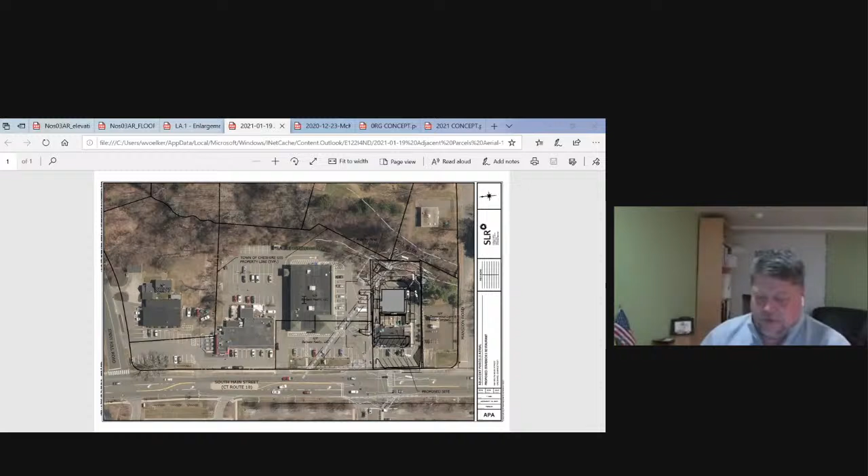And the next one, the special permit application of Nozzle Properties of South Main Street LLC, care of Anthony J. Fazzone Esquire, Fazzone, Ryan, and Mercuti LLC, 2 Town Center, Cheshire, Connecticut 06410, for a coffee shop with a drive-through to serve customers in motor vehicles, and a modification of the side yard setback as permitted under Section 32, Schedule B, Item 6A of the Cheshire zoning regulations. Property located at 944 South Main Street, Cheshire, Connecticut 06410, as generally shown on Assessor's Map number 78, lot number 159 in the C3 zone.

Thank you. And representing the applicant tonight? Yes, Anthony Fazzone, Fazzone, Ryan, and Mercuti, with offices in Cheshire. I'm an attorney. With me tonight is Darren Overton of SLR and Dave Sullivan of SLR.

Just briefly, this is a special permit application and not a site plan, and that's because there is a proposed drive-through, and also we're looking to hopefully take advantage of a section of Schedule 32B in its footnote 6 that allows what you may consider a jointly owned property, allows you to vary and even if you saw fit to eliminate the setback requirements between the two properties.

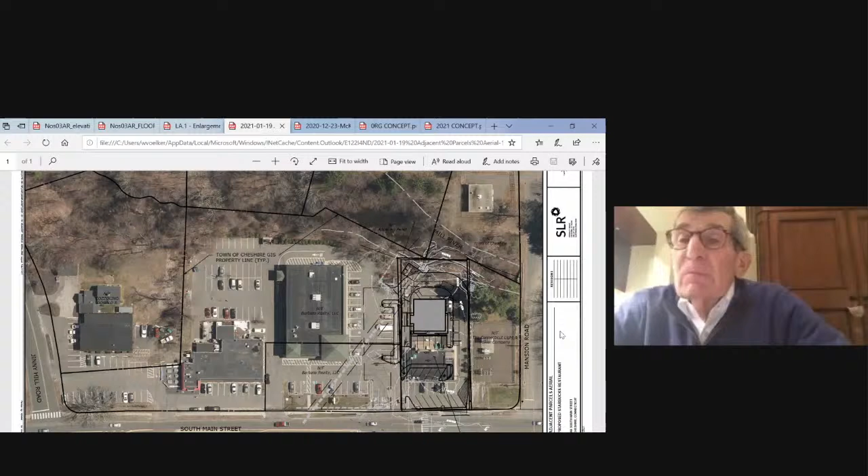We'll get into the details of that, but I'd like to have Darren go over the site plan.

Good evening, everyone. Darin Overton from SLR Consulting, and as Anthony mentioned, Dave Sullivan, our lead traffic engineer, is also in the meeting tonight, so he'll be available to answer any questions related to the traffic study that we prepared as part of the project.

This overall plan shows the relationship of not only the former building at 944 South Main Street, which was the China Dragon Buffet. That building has been removed, and in lieu of that, coming in with this new proposed development.

North is oriented to the left on this plan, and it shows a relationship to the north with the existing Rite Aid building and other commercial developments that go all the way out to Ginny Hill Road. As you can see on that plan, the properties are all developed contiguously. They're interconnected with access drives and parking lots, looping through from the Route 10 entrance that will serve as the access to this property, all the way through to the connection out to Ginny Hill Road.

Abutting this site to the east is the Mill River. To the south is an existing Eversource substation. And then to the west is Route 10, which serves as the frontage for the property. There's existing parking infrastructure that still remains from the former restaurant.

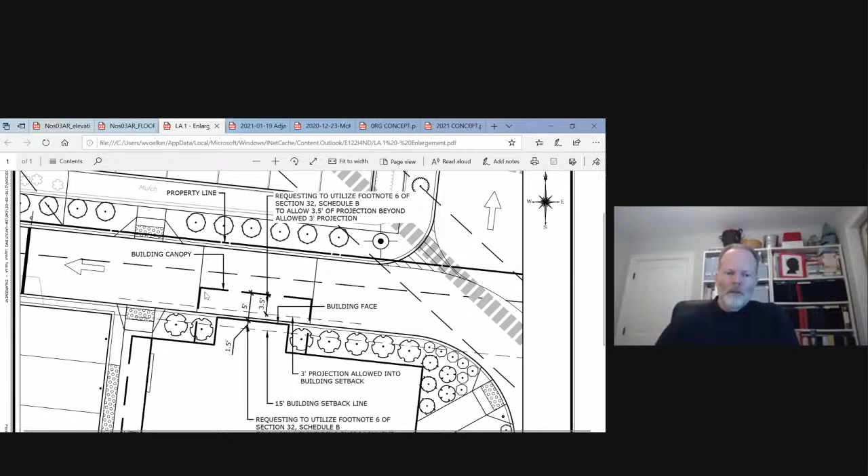We have a small encroachment for the area that juts out of the building to the north for the drive-through window access, about 1.5 feet. Then there's a 5-foot canopy that extends out and covers the drive-through window. There's actually a 3-foot projection allowed in the regulations, so it's about a 3.5-foot encroachment that we're accommodating under the section of the regs that Anthony mentioned earlier, as part of the combined development, section 32, Schedule B.

And that references multiple properties that are maintained as a single project.

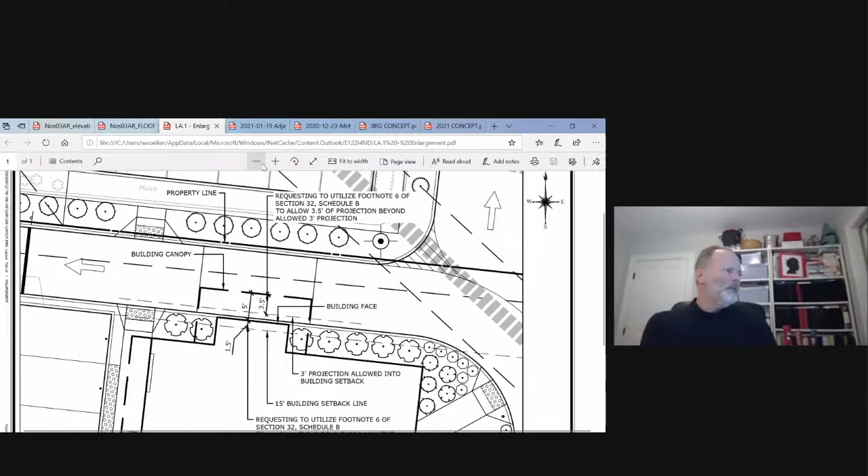The stormwater management plan is pretty straightforward, similar to what exists there. We've maintained the watershed out front to the state drainage system, similar to existing. We have a pipe and catch basin system that discharges to the back of the property where the existing state drainage discharge is located. We have water quality in the form of sumps and a hydrodynamic separator.

Some of you might remember there was a Chase Bank application for this property that was brought before the commission back in 2018. Our drainage system is a very similar setup to what was proposed as part of that approved project.

As part of the notification of the Regional Water Authority, we did receive some comments from them on December 10th, and I talked to Ron Walters at the Regional Water Authority. As part of that discussion, we developed a rain garden in back that serves two purposes: it provides additional water quality treatment for runoff from the pavement on the backside of the property before it discharges into the Mill River, and it also provides floodplain compensation as part of the development proposed within the floodplain.

We do have an E&S plan designed to meet the town and state standards. I'll close by saying we have also received comments from the fire department and the engineering department. I spoke with Mike Kozlowski from the fire department, and they want a fire key box, which the applicant is certainly willing to provide. They also wanted a modification to the existing island that exists at the entrance on the Rite Aid parcel.

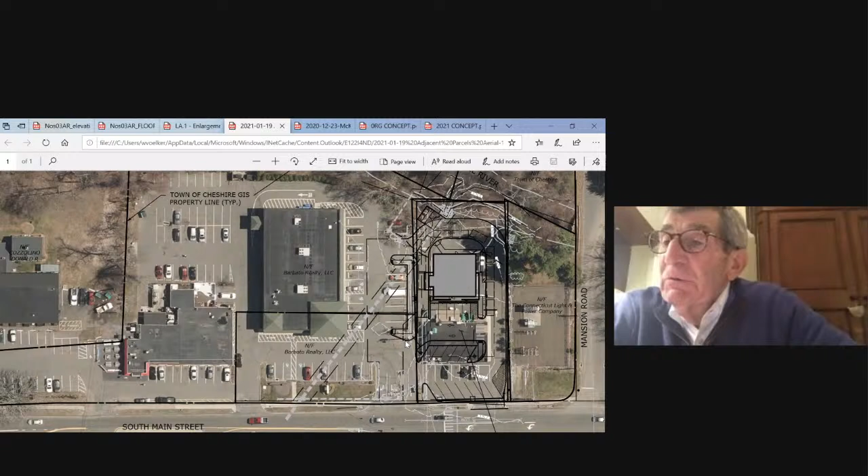Okay, sure. Dave Sullivan from SLR. We did do a traffic impact study.

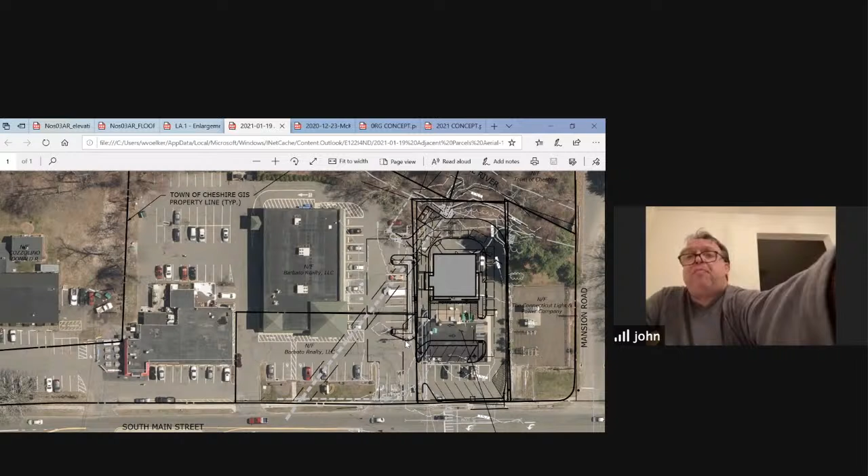Probably the biggest challenge of doing traffic studies these days is the base data. So we did collect data at the signalized intersection where the access would be provided in COVID conditions. We also found some non-COVID data from DOT and placed a traffic counter at the same location to determine what the differences were in COVID versus non-COVID conditions.

Based on that, we increased the morning counts we did by some 23%, and the afternoon counts we increased by, I believe, 35% or 37%. So those were the adjustments that gave us the base traffic volumes.

We then estimated the traffic that's going to be generated. We used ITE. In general, there's round numbers, a couple hundred trips in the morning that'll be visiting the site, and about half of that in the afternoon.

And we assign that traffic to the traffic signal with the increased traffic volumes. And we found that the levels of service will not be impacted, and generally good levels of service will be maintained during the peak hours.

We looked at the queues. There'll be very little impact on queues, and the maximum queue exiting the driveway was found to be 3 vehicles, which we checked to make sure the circulation at the signal, at the driveway to the signal, would work. So that's a thumbnail. I'll be happy to drill down on any particular issue or any questions you may have.

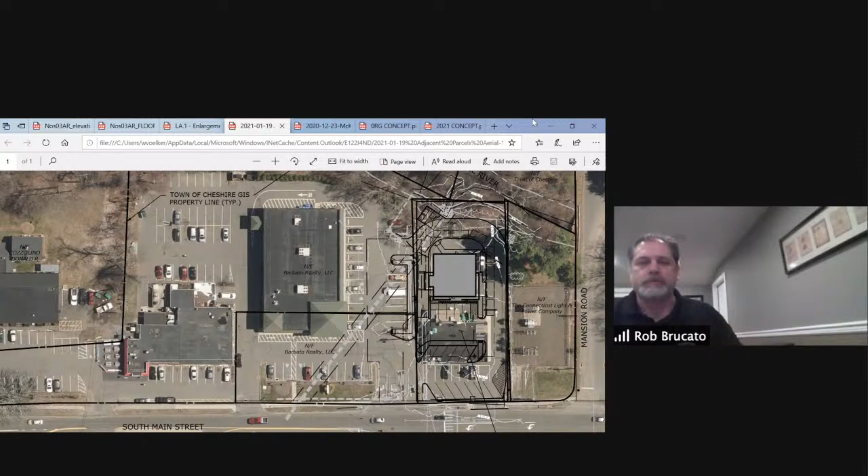The design of the building itself, what you guys proposed, I personally don't feel that it fits in this area of Cheshire, maybe something over in the ISS zone. I'd like to see something that's designed more with mansard or hip type roof that fits in. Even the Rite Aid that's right next door has that type of feel, and then you have little roofing on the little plaza. And if you even go over to Pizza Hut, that has some nice roofing, not this new contemporary look.

That I'd like to see change. I don't know what other commissioners feel. I just don't feel that that's the fit we're looking for and trying to bring into Cheshire, especially in this area. I know I've worked on the gas station down the road to get that to fit, have a better feel. So I just wanted to make that clear that at this point, I don't like the design of this building. I think it needs to come into what we want to feel in that nice village type look into Cheshire.

The other quick question is, with the power station or whatever that is right next door, moving that extra 5 feet for that awning, is there any kind of trucks that need to get around there? Is there any easements that they have that might interfere if they're trying to work on those lines? Because I know they have a lot of room on one side, but I don't know if they have to get on both sides of that little building that's in there. Do we know if that's been cleared through them?

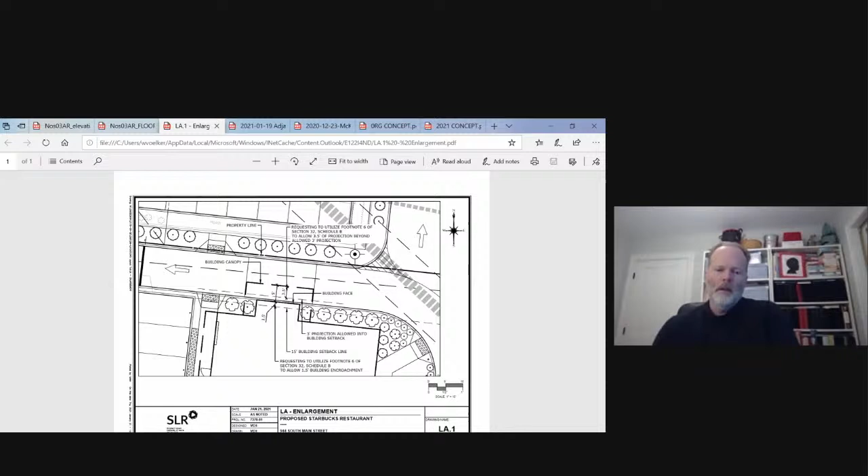We did look at the substation to the south, and we talked about bringing the service in there. To meet their standards, they can't bring a pole over to the other side that close to the substation. So they made us aware of the requirements for that. And we do have an agreement with them to bring the service in on a similar alignment to the existing building, but then bring it underground from a new pole.

So the proposed development does not restrict access to the substation. Based on our field discussion with Eversource, there's nothing that we're proposing that would impact how they manage or operate that substation. Good, thank you on that.

Okay, I think I saw Mr. Natale. Actually, Mr. Vizzoni, did you want to respond to any part of Mr. Brocato's comments? Well, I just briefly...

Dealing with national franchises, Mr. Brocato, they are very, very jealous of their designs, and they make it very difficult for a developer to make changes. You know, we do feel that the design is appropriate. It's certainly a huge improvement over what was there. That's about all I can say with respect to the design.

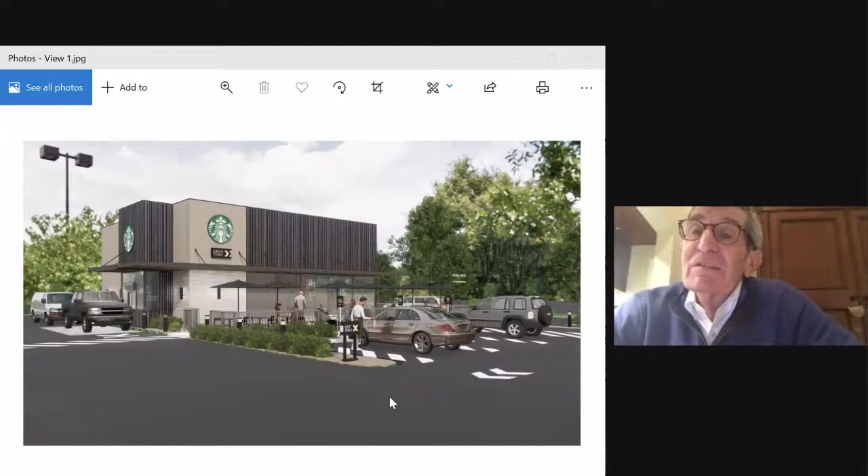So, I mean, I work in Shelton, and up there they have a Wendy's, a Starbucks, a gas station, a whole bunch of stores. They all look really nice. They have all mansard hip style, looks like a little village, and they have no problems. I don't understand how Starbucks can say, hey, we don't want to fit in the look and feel of your town. You want to come here and fit in. That's what our POCD says. We want it, we want people to come in. I want Starbucks to come here. I just want it to look like it fits into this town.

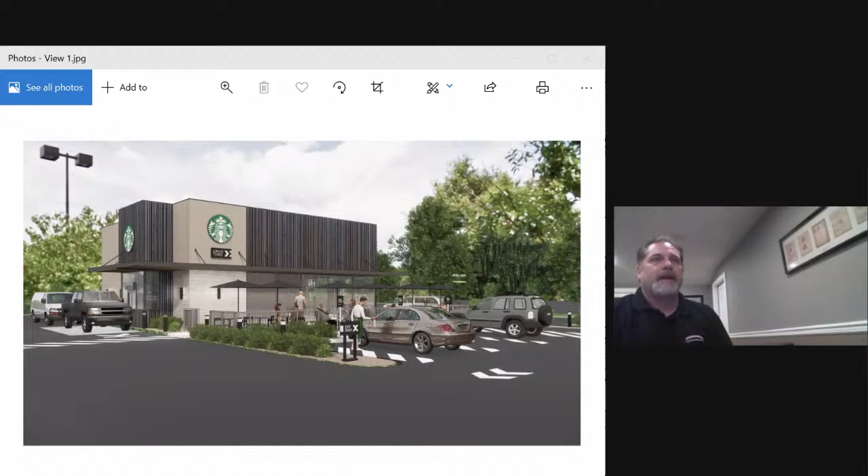That area is turning around. I'm trying to get away from the bad mistakes we made where we let buildings like this, these contemporary style buildings, look down there. I want to bring it back to Cheshire Village. That's what the people of this town talk to me about. They see me out when I'm shopping, I have friends, and they want that nice look and feel of a little village. I pushed that and brought it up for the little gas station. I'm doing the same thing here, and I hope the rest of my commissioners follow through. I would love Starbucks in here, I just don't like that design. It does not fit in this town. Thank you.

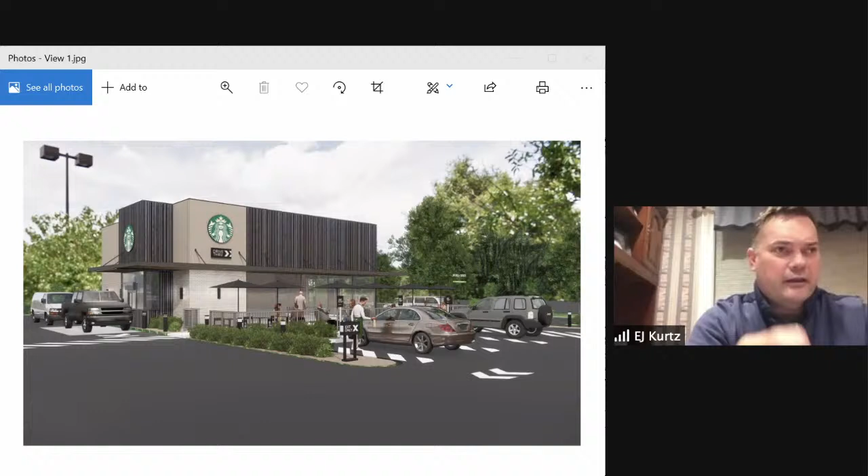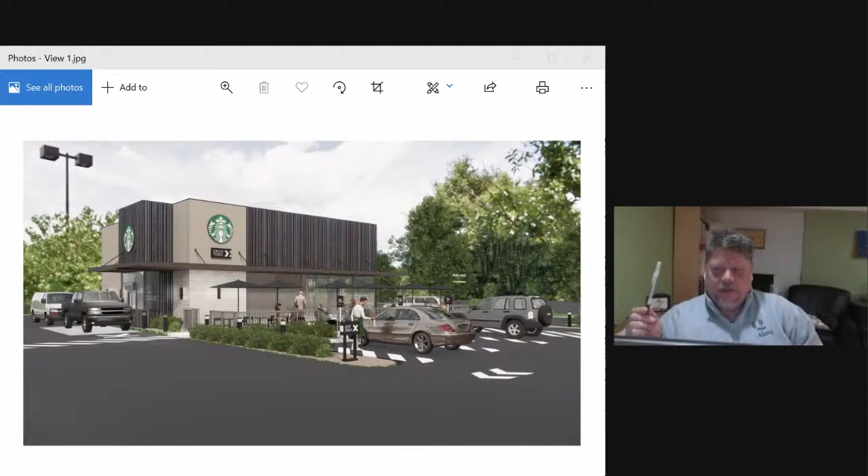Okay, Mr. Natale, and I think Mr. Todisco had a question also. So as far as the parking goes, I know that you're proposing having 8 parking spots next door to the Rite Aid. What does that do to the required capacity at Rite Aid? Does it affect that at all? Does Rite Aid have an overabundance of parking? You got a lot of parking out there. Okay, it's a lot, but with the regs, you have way more than you'll need.

Combined, they got plenty of parking out there for both facilities. That parking lot is never full. Rite Aid's parking lot is never full. Never close, I understand that. I just want to make sure that we're not robbing Peter to pay Paul here.

Mr. Natale and the rest of the commissioners, we did submit an easement agreement between the two property owners, 922 and 944. It has, and so Rite Aid was aware of the fact that those 8 spaces would be shared spaces. And in addition, the regulation does allow for some shared spaces. And in this case, it's anticipated that the peak uses of the parking spaces would be at different hours.

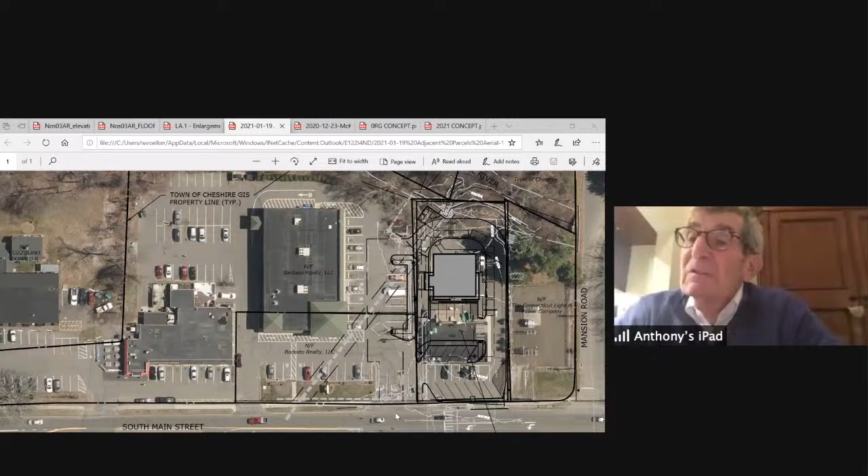Gotcha. Starbucks would be in the morning and later in the afternoon. Okay, and just for clarification, I don't have a problem with the shared parking space. I just wanted to make sure that there was enough parking to support the two businesses. Thank you. Okay, Mr. Todisco, did you have a question?

Yes, just a couple things. I don't know that I would vote against it for this reason, but it seems to me that Mr. Brocato raises a reasonable point. A lot of times we've looked at the design of buildings in this area of Cheshire, and it seems to me that perhaps Mr. Vizzoni could go back to the company and see whether they'd be willing to work with some modification that might make it fit in a little bit better with what's there. So I don't think it would make me vote against it, but it seems to me we have a company now coming into our town, and maybe they should try to work with the town in terms of the appearance of their building. They may say no, but at least I think the effort should be made, and I would support Mr. Brocato's effort to have that conversation.

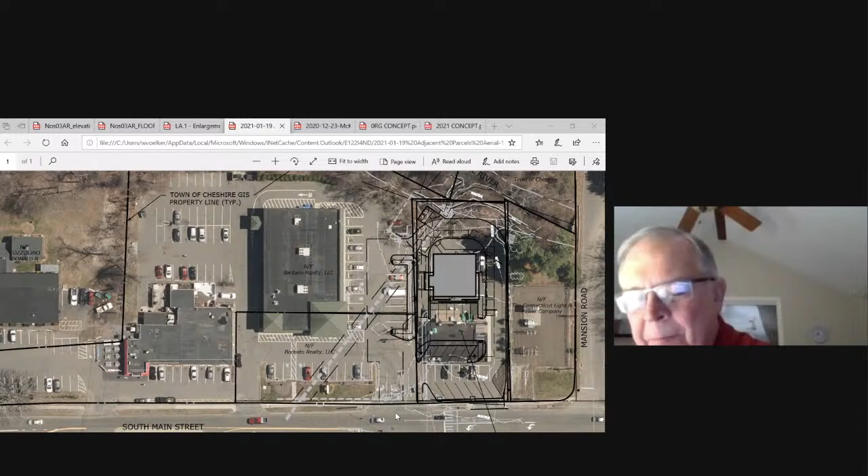On the queuing, which he also referenced, it is really very difficult sometimes to get into Big Y because of the queuing at Dunkin' Donuts at different times of the day. Here, we're not going to have another business, so I guess the only queuing will affect the Starbucks itself. Mr. Sullivan, certainly we're not going to have a situation where cars back up to the road, are we? That can't happen with all the space you have. Could you tell us that?

Yes, cars would have to be backed up. There'd have to be 20 or more cars to back up to Route 10. And frankly, I don't know who would wait in a drive-through that long for a cup of coffee. I suppose if they were giving it away for free, you might have that situation. But from a practical standpoint, the state asked us to have 14, and we have probably 20 before we get to the state highway, and 16, 17 of those are on site.

Okay, well, I just think we have to ask that. I've asked now. Of course, once you're in the line there, it's hard to get out. You may be waiting for a long time, but there is a bypass. So if you get in line and you're frustrated, you can just pull out of line and exit. The last question is for Mr. Overton.

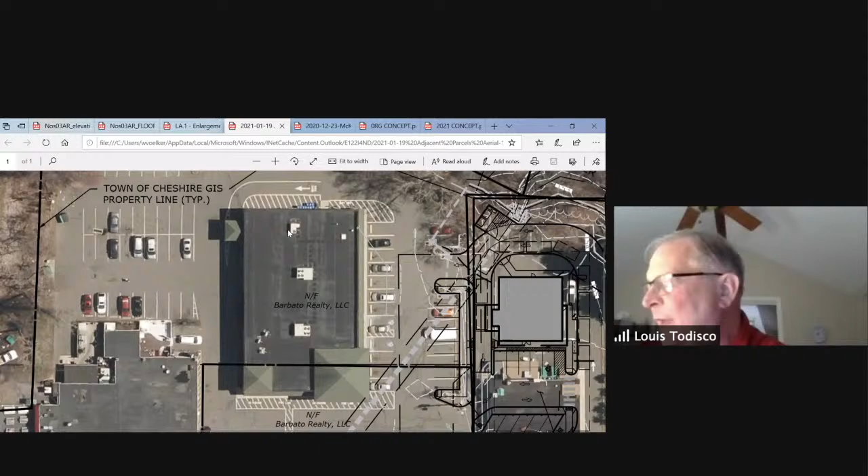I think I know the answer already, but I believe you're the applicant seeking a waiver of Section 9 of Section 25.5 of the regulations. Can you at least confirm to us that the activity proposed would not create a substantial risk of damage to an abutting property or to the road or any other property? That's a finding we have to make in order to approve a waiver of Section 9, and I haven't heard anything in the record on that yet.

Mr. Todisco, if you read Section 9, it actually causes a problem with grading of a road just to match the grading. If the area is a little bit below the elevation of the road and you're grading up to that, I interpret Section 9 as saying you need an earth removal permit to do it. There's no major excavation here. I think Darin may be better qualified to say that, but we primarily do that, even on subdivision applications when you have to tie into a road.

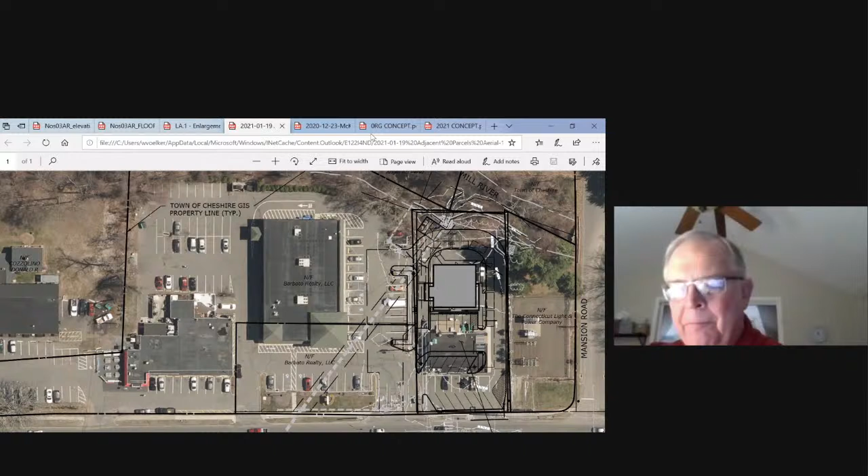I believe the way that's written, it would apply, and I think Darin can address the issue of whether or not it creates any problem with adjacent properties. Well, yeah, that's all I'm asking. It seems to me, don't we have to make that finding? It says the commission has determined that such activity would not involve or create a substantial risk of damage to the abutting property. I'm just looking for an engineer to tell us that's not going to happen.

For the record, Darin Overton from SLR. Along the frontage here, we're holding the existing curb line. The DOT had made some improvements in the sidewalk and I believe a pedestrian crossing along the frontage of this property, so the sidewalk is in good shape. It has an integral curb that's right along the street line of this site. So we essentially held the grades there and the catch basin that drains to the DOT system, and it makes sense to do so by maintaining what's there now, what works and functions well, associated with adjacent properties and the state right of way.

We're working off of those grades and adjusting the site grades as we move back into the site to accommodate the new development. I believe what we are proposing, there's no existing issue that we are aware of, and what we're proposing would not cause any adverse condition for adjacent properties or the state right of way. And we have sent plans to the DOT District 1 office for review as part of this.

One thing I'd like to add about the queuing, and this comes as part of, we've moved through almost a year of this COVID era. I'm sure all of you have experienced the situation where most restaurants, and typically also a Starbucks, have more online ordering. Many of these commercial or retail or restaurants are doing is there's actually a front pickup window here. So you can do an online order, and I like Starbucks, I've used their app before, and it actually tells you a time. If you're too far away, you can schedule when you pick that up so it's ready. People can drive up to the front and don't even have to enter the facility, they can pick up at a front window. It's almost like a drive-through window, but it's a walk up along the front sidewalk, which I believe also helps to cut down on the amount of vehicles going through the drive-through.

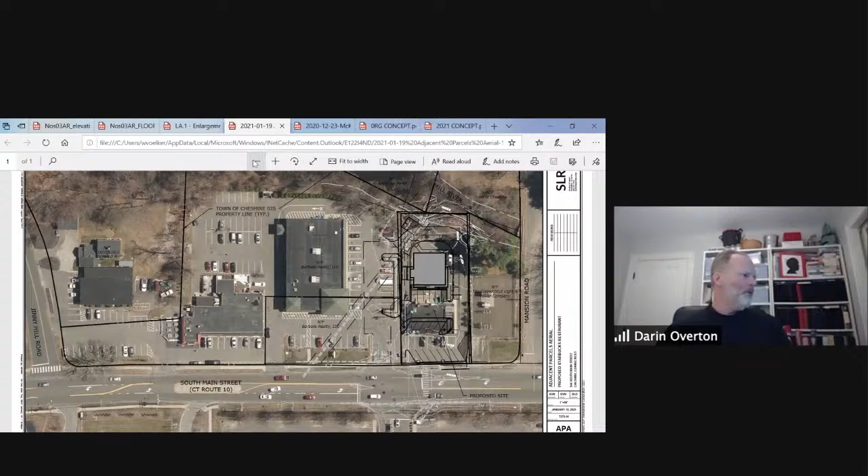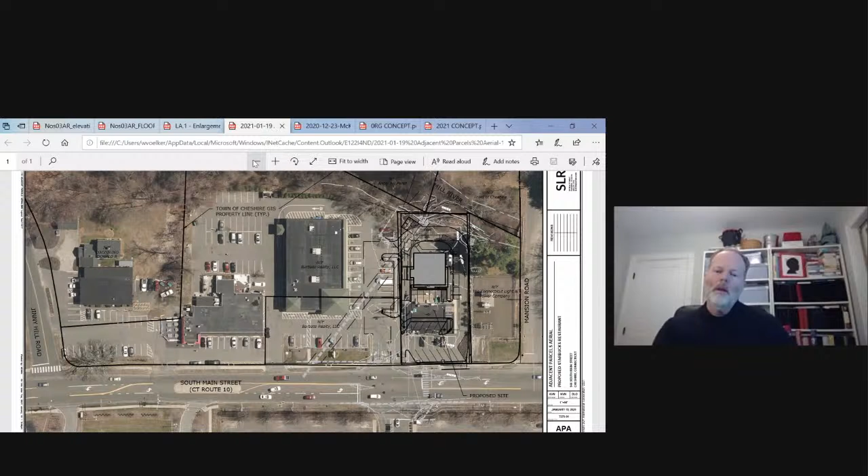I can answer that. I did speak with Ron Walters at the Regional Water Authority, and we did provide a response letter. Although the native species is considered invasive, what we're proposing is a sterile plant that doesn't reproduce. So because of that, there is no issue. What we're proposing is not an invasive plant, so Ron said that was acceptable.

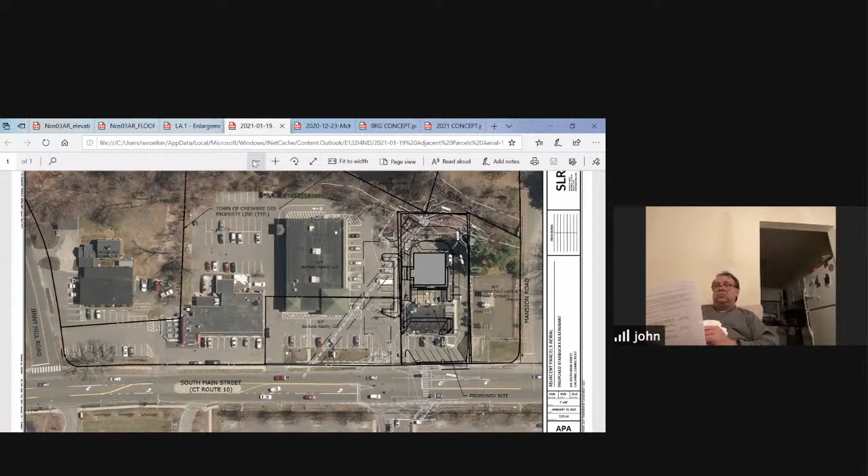You can't do better than that? His concern was that it was invasive. Right, it's a plant that people would like to get rid of all the way around.

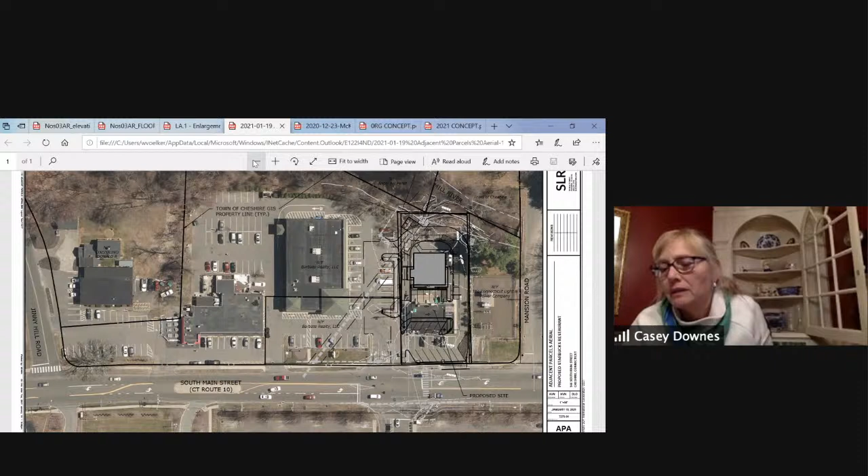But I guess my main concern is taking the left, so I'll get back to that. I had three things: the traffic, the building, and the plantings. But also in section 32, where it says in considering such a change, the commission shall be guided by the following: traffic circulation and access management, including the location, amount, and access to parking, traffic load, or possible circulation problems on existing streets.

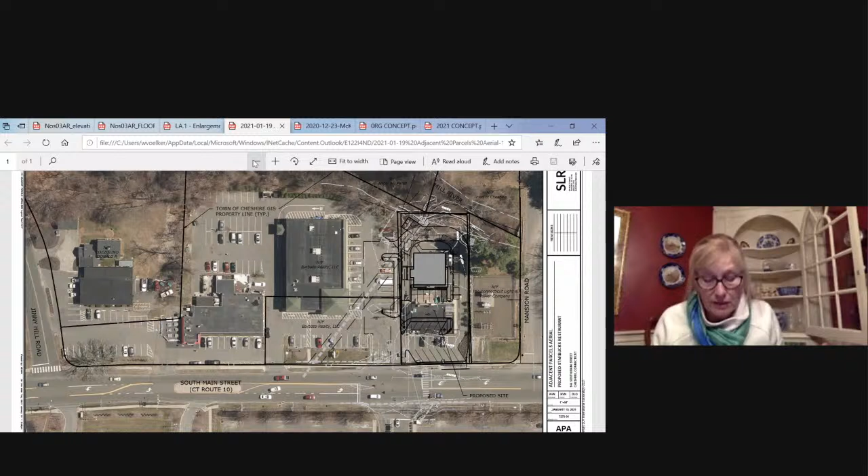If I can't take a left now, I can't see that it's going to get any better unless something's done to make that entrance bigger. Because when you're trying to swing around, it's like you're taking that left and taking your life in your hands with the traffic coming north. Is it possible to get a traffic light with a left green turn, so you can take a left?

Hi, Dave Sullivan, SLR. We can discuss that with DOT, but it's not quite that simple to just add a couple of signal heads and arrows to it. No, I know it's not simple, but that's why I'm asking now before it progresses further, because I see it as a major blocking point. Well, we will discuss with them, see if that signal's up for upgrades or anything like that, and if that would be something they would consider.

They do have the left turn lane, and they run left turns either protected with arrows, which they have in the northbound direction, presumably because of the volume of traffic, and permitted in the southbound direction. I will say that in the morning the volumes are a little bit lower when the volumes entering are a little bit higher, and again much of the coffee business comes from the near side direction.

However, I could understand about the left turn arrow, and we will have the discussion with DOT, but it's not something that could practically be done for any reasonable cost. You're talking about hundreds of thousands of dollars, maybe, depending on the vintage of the rest of the equipment, so it would have to be done as part of a statewide upgrade of signalization or something like that.

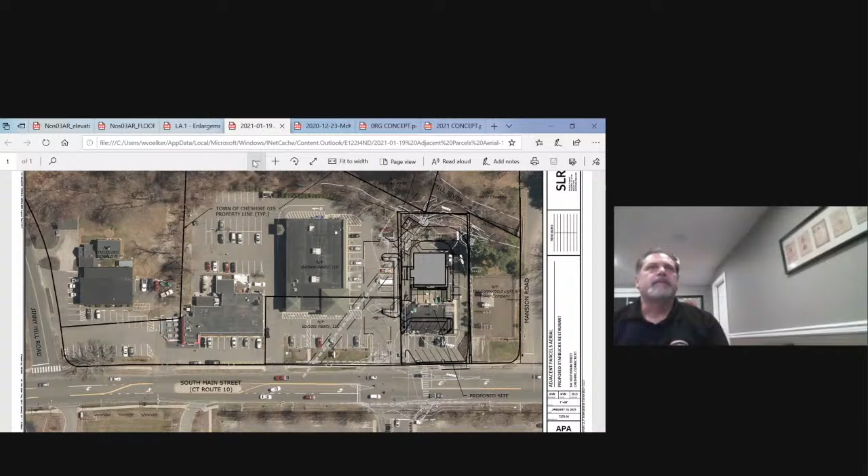So they're upgrading all the wires to the poles. Does that come all the way down south? Do we know? Because I know they've done it on the north end by me, taking out all wires and putting in those poles that can swing out of the way. I don't know, is that coming, is that all of Route 10?

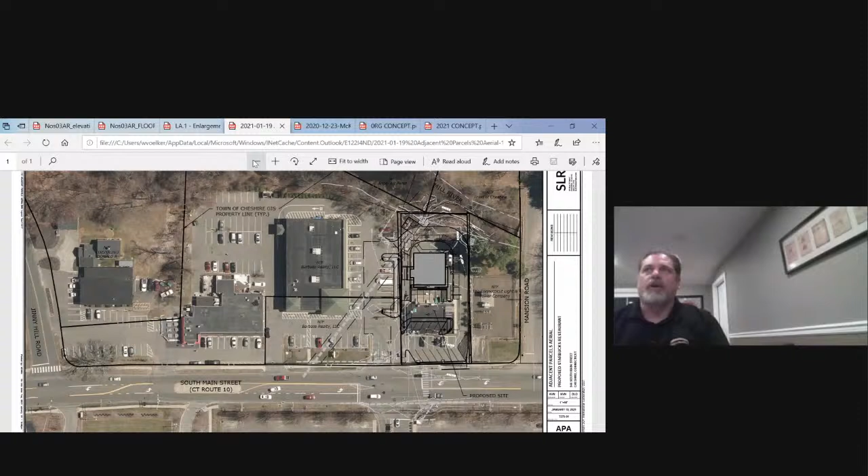You're good boy. Lay down, lay down, go down.

I don't know personally.

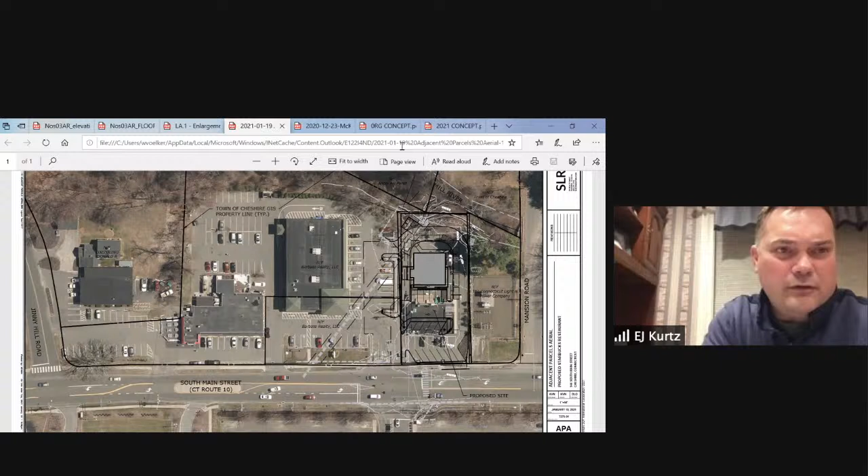I'm a little confused. Are you referring to an arrow that would be if you were headed south on 10 to turn left into the place? Yes, I can't get in there. When I go in there, it's hard to take a left into that spot because it's also a sharp turn. It's really a right angle. There's nowhere you're kind of swinging around.

It's pretty sharp, and it doesn't line up directly across the street. Well, if I may add, the sharpness is to go over to Rite Aid after you enter. The intersection itself is pretty much 90 degrees, so it may feel like that because after you enter the driveway, if you're going to that parking area in front of Rite Aid, you're making kind of an extended left turn.

But isn't that where people are going to be stacking up? Well, the stacking up for the drive-through—once you take your left turn, you'll take a right turn into the Starbucks. So you'll just slip right into the Starbucks and never get to that point of Rite Aid, and just flow in a counterclockwise direction around the Starbucks. There's plenty of parking if you want to park and walk up, as Darren suggested, or if you want to stay in your car and go through the drive-through.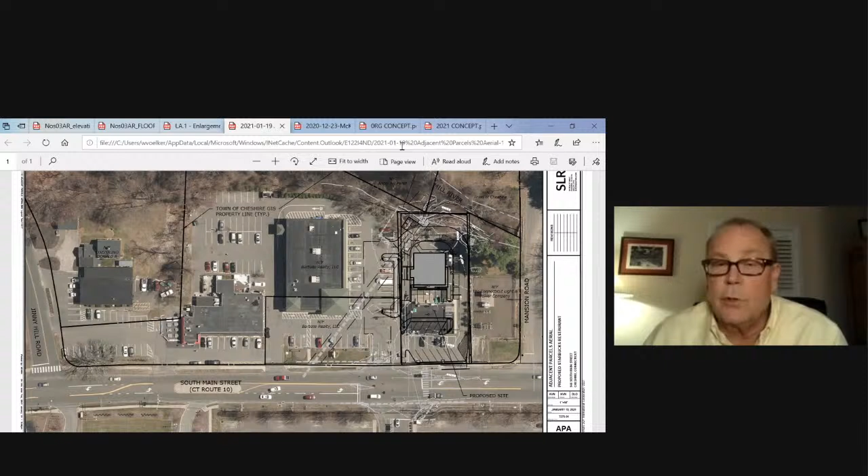And then when you exit, you're exiting in the corner of the property where you're sitting at the top of the intersection with visibility to see if there's vehicles in front of you. And we expect there won't be. I'm not as worried about the people getting out of Starbucks.

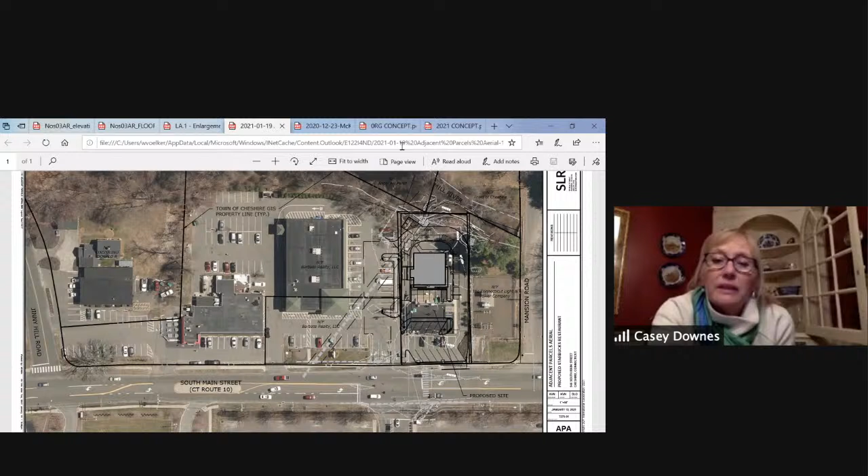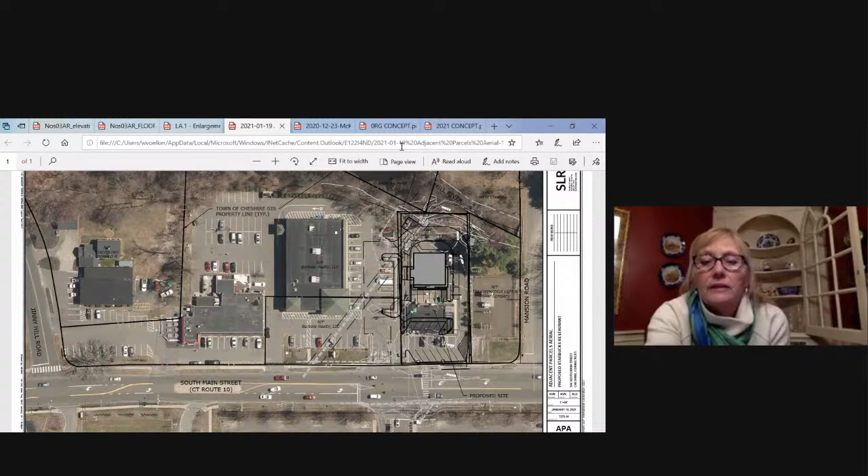I just know currently there's a fence there, like a chain link fence around all the dirt and the construction area. You almost hit it when you go in there because the width—sorry, I'm pointing at the screen—the width of that, like I'm looking at it on my own, is very narrow. So when someone's pulling out of Rite Aid, there's a little raised area there. You have to get in there very straight, and it's harder to do than it might look. I don't know if anyone else uses it. I'm in there all the time, and it's not easy.

So then you're going to be trying to get in there, someone's going to be trying to take a right to get into their stack up, and I just think it's going to be all stacked up all over Route 10. I don't think it fits in with the traffic circulation, and I just think it's going to be stacked up down on South Main Street. I mean, there's a left turn lane, just no left turn light. Right, but you're just sort of sitting there in kind of no man's land, and then the people start coming out of the other side and they're pulling around. There just isn't a lot of room there.

Well, I might suggest that, in terms of being able to take a left turn off of Route 10, other than having the left turn arrow, which does exist on some of the signalized intersections, having a left turn lane in a signal of any kind is one of the better conditions along Route 10.

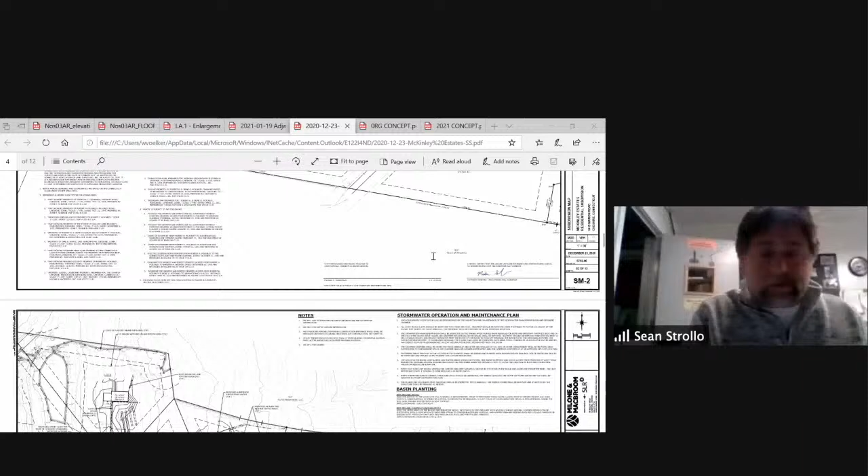Thank you, Mr. Fazone. Again, for the record, Anthony Fazone. As the call of the application reads, it's a 13-lot re-subdivision. I think it would probably expedite things if I just quickly turn it over to Darren to go through the details of the subdivision, and then I can cover some of the technical stuff.

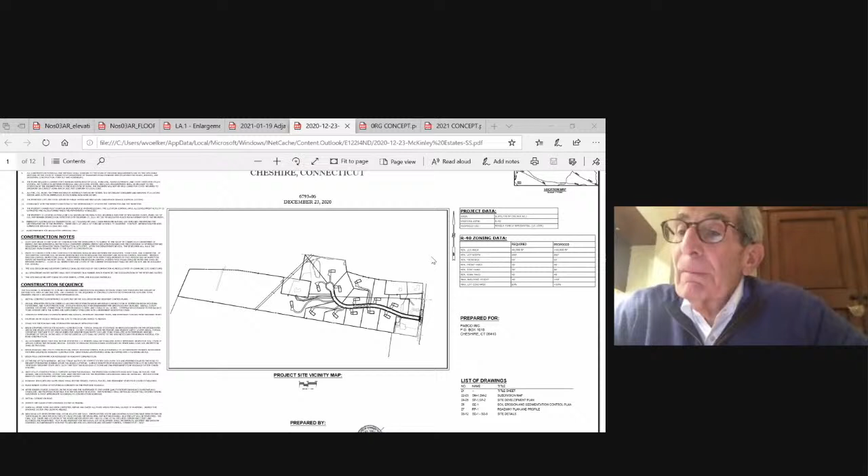Mr. Overton? Sorry, I was just trying to get a drink of water, I was coughing. Again, Darren Overton from SLR Consulting, licensed professional engineer, offices at 99 Realty Drive in Cheshire, Connecticut. So what we have proposed here is a standard R40 subdivision.

This is the McKinley property, which is a former tree farm. It's located on Marion Road and is surrounded entirely by R40 residential, some of which is developed under the zoning, and there's a good portion of the area around it that still remains undeveloped. There's an existing barn and farmhouse on the property. The property slopes from west to east towards Marion Road and also slightly to the north. There's a pond in the northern middle of the site, which has some wetlands associated with it and a water course that drains out of it.

This project was presented to the Inland Wetlands Commission. We have very little impact within the upland review area, and they made a determination that no permit was necessary based on the limited activity that was proposed within that upland review area.

The site is mostly open field, which is remnants of the old tree farm. There is a wooded portion on the west side up and back, mostly beyond the gas transmission line, which is a high pressure gas transmission line.

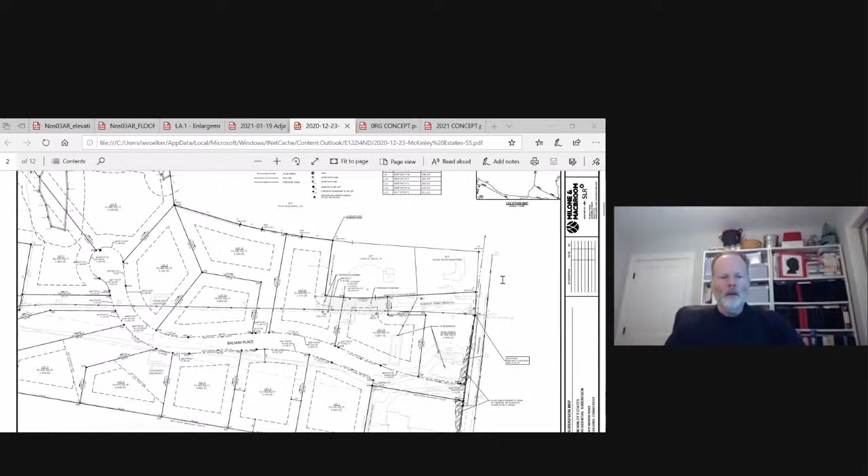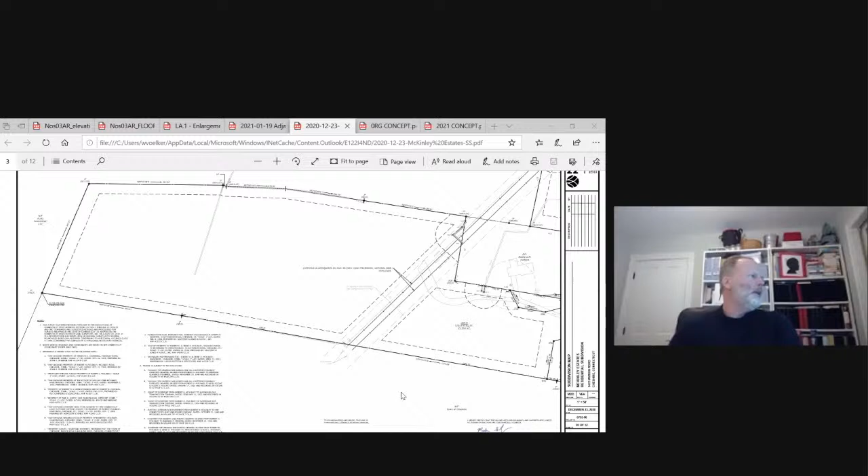There's an easement that Bill is showing you there at the western portion of the site, which is not proposed to be developed at this time. That's the area where the high point in the site is. So the elevation change from that high point in the middle western part of the site is about 443.

Out to a low point near the intersection with the existing McKinley Road and Marion Road, that's elevation 177. The property is not located in an aquifer protection zone or a public water supply watershed. The property drains into the Mill River watershed. There's no FEMA regulated 100-year floodplain on the property.

So what's proposed is a 13 lot standard R40 subdivision. The lots range from just over the standard size of 40,000 square feet up to that lot in the western part of the site, which is about 13 acres.

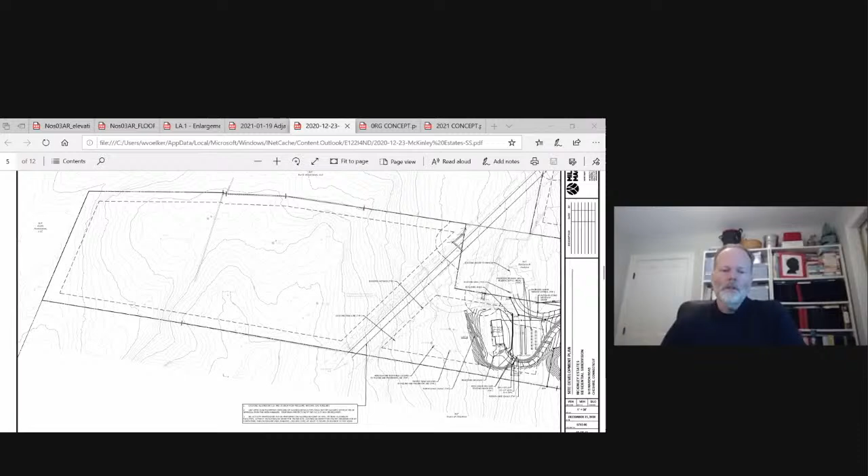We're proposing a town cul-de-sac. It's designed to the town standards and is planned to be turned over to the town, as is typical with subdivisions. That cul-de-sac road extends about 1,300 feet from the intersection with Marion Road westerly to the cul-de-sac that you see on the screen.

The proposed development will be served by public water and on-site septic systems. As far as stormwater management, we've kind of maintained the watersheds with this sloping to the north and the east. The roadway also slopes down to the east towards Marion Road.

You can see on this plan, there's a stormwater detention basin that's proposed up along the frontage of Marion Road. That's essentially the lower part of the site where the water wants to drain to. We have a standard pipe and catch basin type of system designed for a 10-year storm that drains into that basin. There are sumps and a sediment chamber for water quality, a sediment forebay.

We did some soil testing there and found that the soils are a very good sand and gravel soil, so a good portion of the first flush runoff from the roadway will likely infiltrate into the ground. But we've also sized the basin for peak flow attenuation, so there's no increase in peak rates of runoff for up to the 100-year storm.

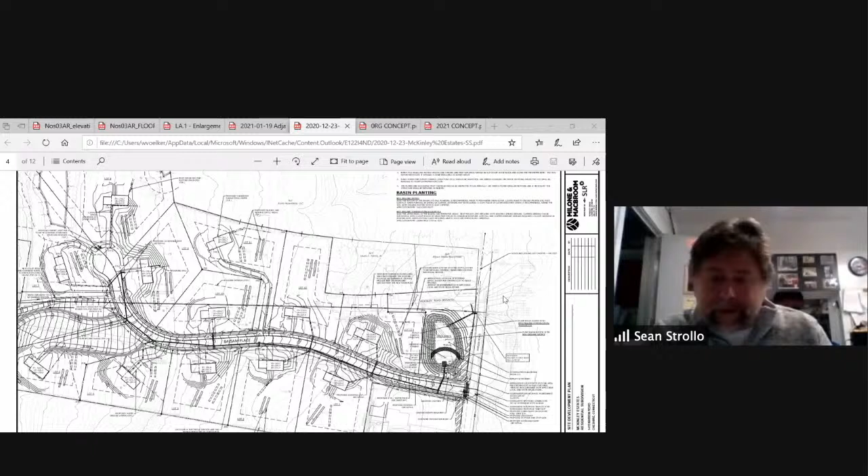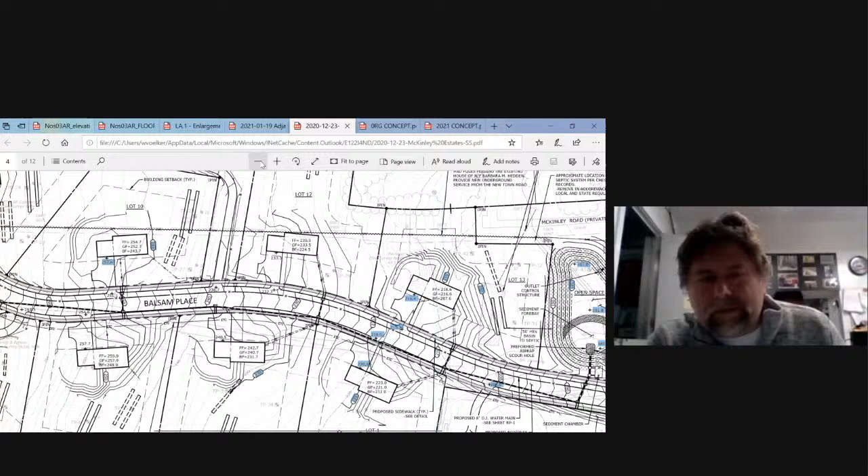Yeah, the overflow—Darren, I'm sorry to interrupt. Go ahead. I can't see on this map what the topography is of the road on Marion Road. What is the number on Marion Road? I know it's 280 up at the top at the cul-de-sac, but what's the road itself? So at that intersection with Marion Road and McKinley Road, kind of the northeast part of the site, there's a couple of catch basins, and that low point is about 177. I'm going to bring up my plan and zoom in on it here. So we're 177 at Marion Road and 279 at the top, right? Yes, that's what I'm trying to say. All right, thank you, sorry to interrupt you.

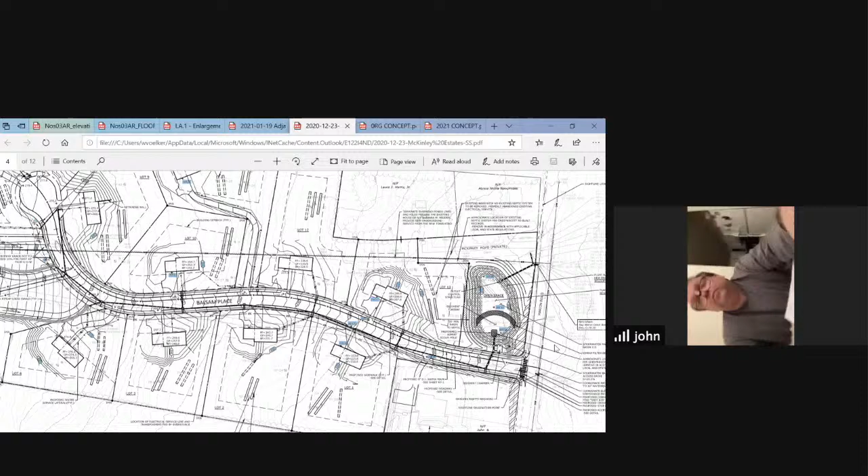No, that's fine. So just to close out, a few more items: the stormwater basin has an outlet control structure that overflows and ties into the existing drainage system on Marion Road. There's a 24-inch pipe that exists that goes across the road, so we're tying into that.

We do have an erosion and sediment control plan and a construction sequence, again designed to town and state standards. We did receive fire department comments on January 20th and also engineering comments on January 18th. We have not had the opportunity to consider revisions of the plans to address those comments yet, but we are considering those this week, and we expect to have those addressed for the next meeting. So with that, if there are any other further questions, I'd be happy to address them at this time.

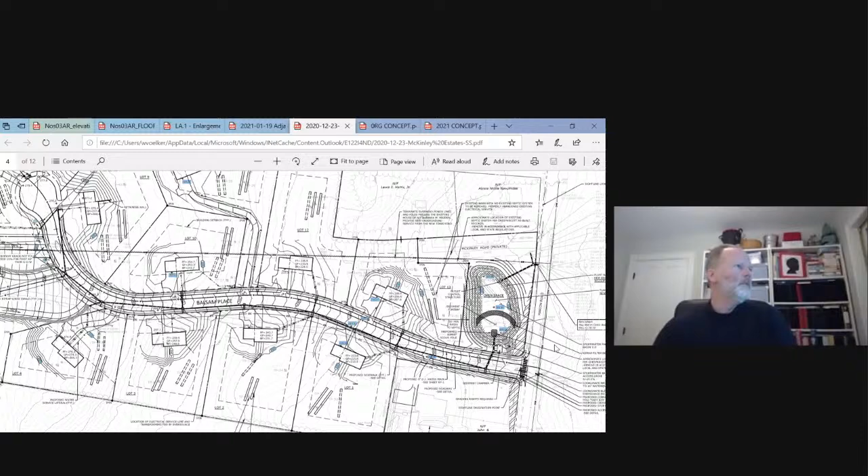I can't see all the commission members, so please just—okay, now I can see everybody. Okay, any questions from commission members?

Any questions? Mr. Natale just couldn't really read it online, had to put on glasses to read it. We have sidewalks on both sides, correct? Yep. Okay.

Darren, could you explain why we have an earth removal permit application here? I thought that'd be perfect for you to explain, Anthony. Well, it's the same situation with the excavation that's necessary to tie the new road into Marion Road. Unfortunately, that section 9 we're asking the waiver for doesn't say if it's 50 feet or 2 feet.

You also have a detention pond that's right up against Marion Road as well. A couple more things: we will have a homeowners association that'll be required to maintain the detention basin.

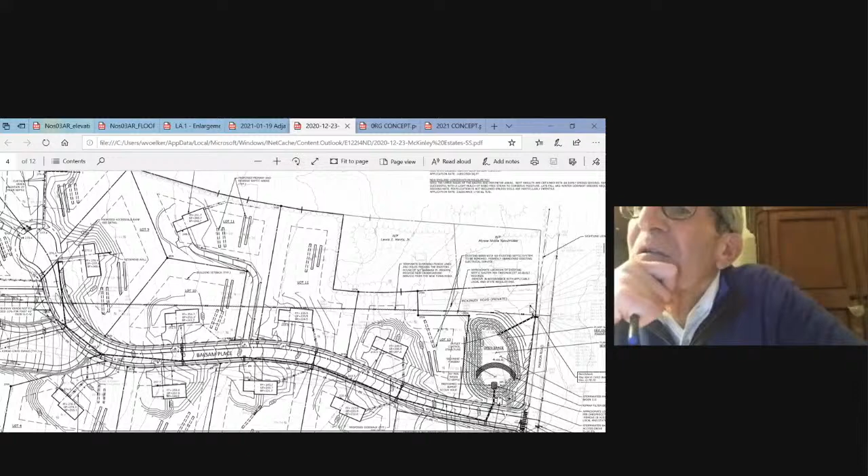The lot immediately adjacent to the detention basin has an easement that will go over that property for ingress and egress. It's the area of the homeowner's property where it says McKinley Road - does it say private? Yes, right there. So that's where we'll maintain the 50-foot width. We're not proposing anything new; the easement they have requires that they maintain the road for access to their properties.

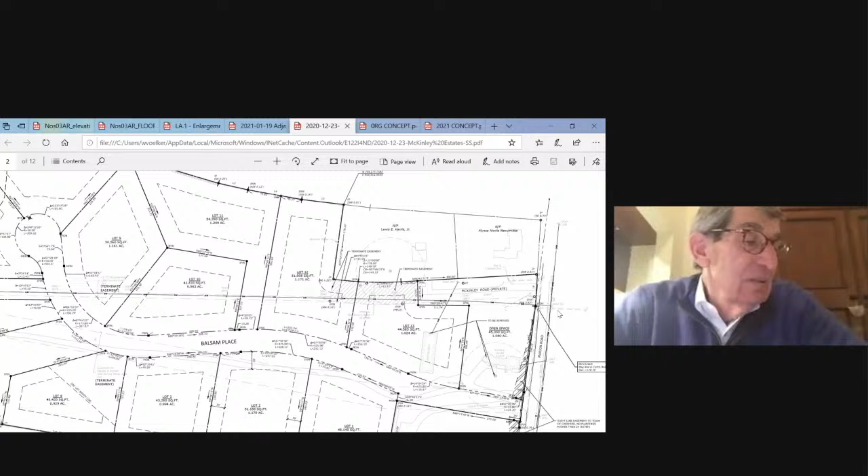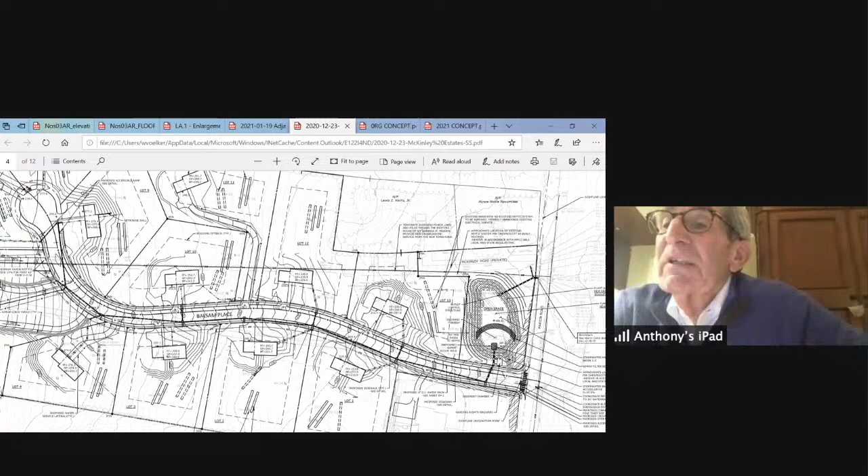Okay. Is that how the detention basin will be serviced, through that easement, or will it be serviced through the main road? I don't know what the elevations are. Darren, where would you think they'd be maintained? Access for them to the detention basin for maintenance.

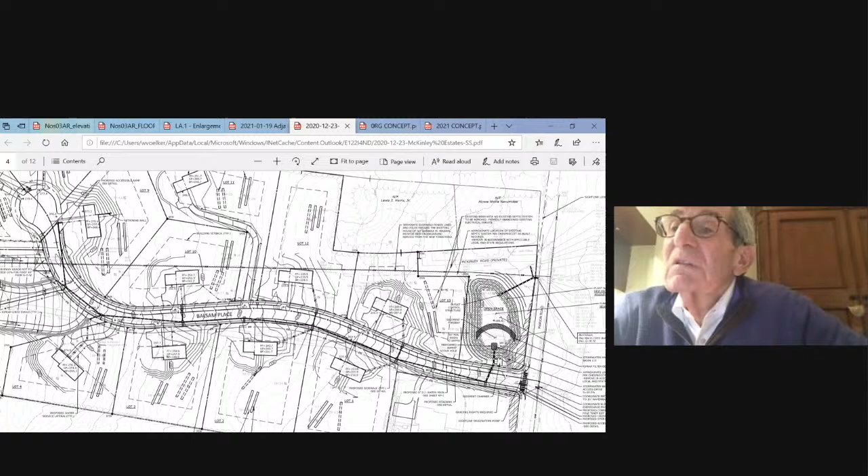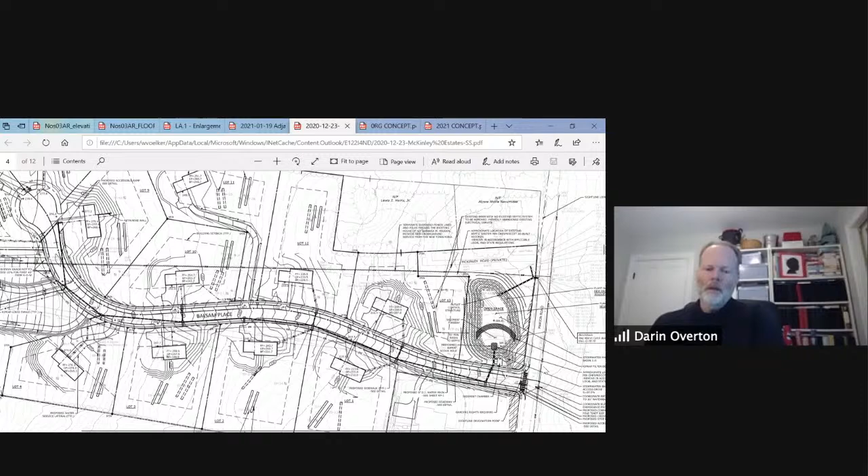Sorry for the delay in unmuting. There's an access drive proposed coming off of the new roadway, right near where the drainage discharge is into the basin from the new roadway. Yes, that location.

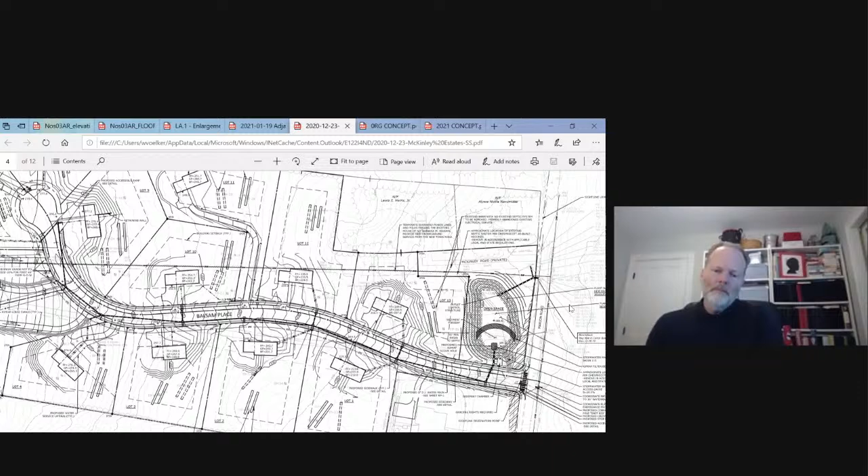Commissioner Strollo, to clarify, at the intersection with Marion Road, our proposed intersection is about elevation 182. From McKinley Road, it comes up from about 177, rising to about 182 at our proposed intersection. Oh, so it dips at the bottom? Along Marion Road, along the frontage, right at the intersection with McKinley, those catch basins are at a low point. Marion Road rises up in both directions, north and south from there - the road rises about 4 to 5 feet, from 177 to about 182 at our intersection.

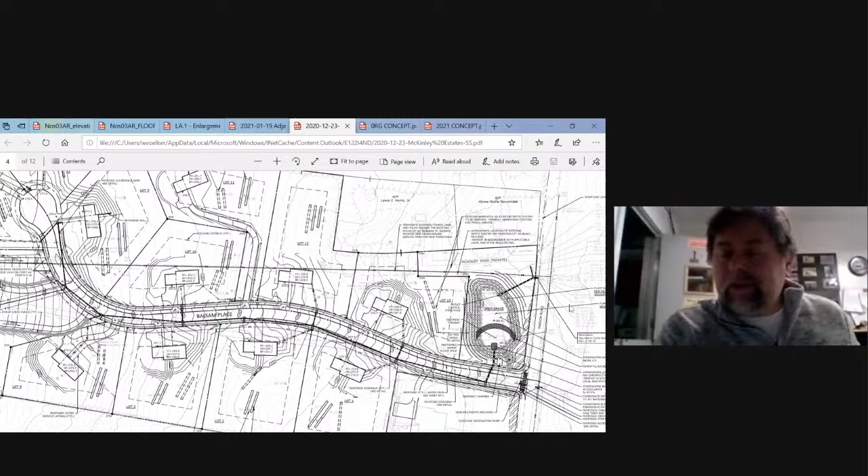Okay, thank you for that information. Any other commission members have any questions? And I can't see you.

Mr. Mercado asks: that leftover lot behind the gas main there, is that landlocked, or could that get access? No, it's all part of one lot - one great big lot, Rob. Not landlocked, it's a big lot.

But is there any way to get back there to do any building in the future? Very hard to do because of the topography back there. I don't want to say anything's impossible, but they're showing it as a permanent dead-end cul-de-sac, not as a temporary right of way to go further up the hill. The topography back there is very difficult, and the easement creates another impairment, so it's very difficult. They're not laying it out as if it's going to be developed at any time in the future. Okay, fair enough. Thank you.

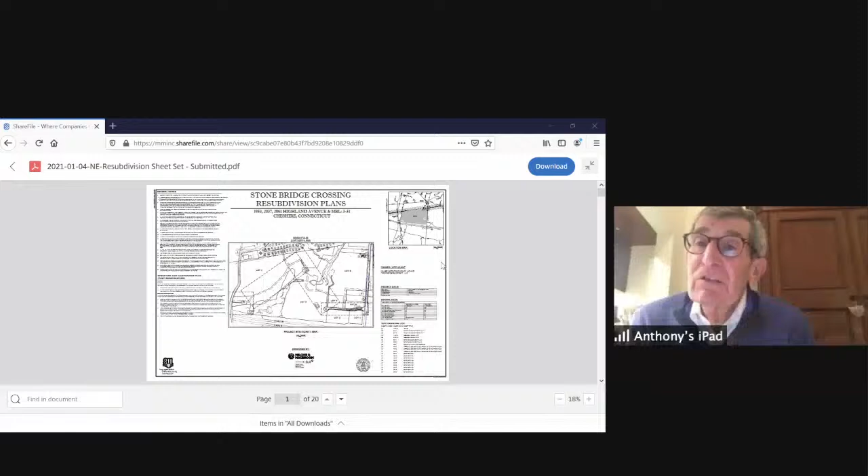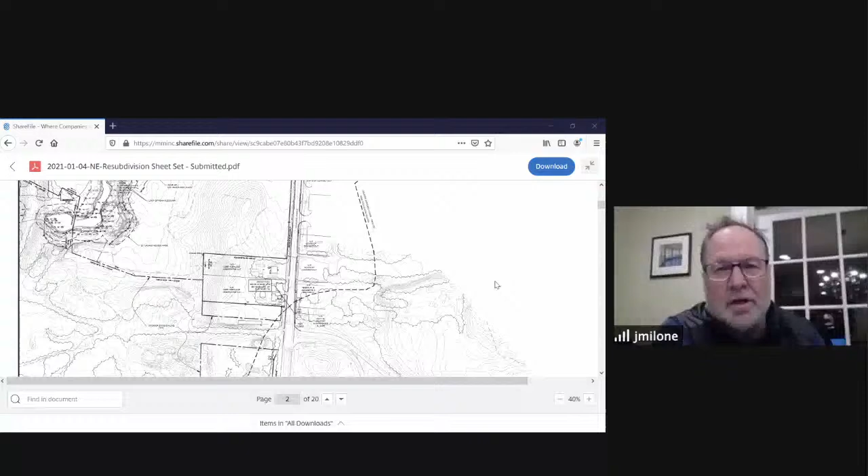John, you and Darin can go ahead, whichever you want to start with. First, the subdivision might be easiest. I'll get it started. This is John Milone from SLR. Darin was going to stay on in case you actually had a question that required intelligence. So thanks, Darin, for hanging on.

So Bill, thank you. If you recall, this is a fairly large site, about 100+ acres. Half of the property is on the east side of the 10 Mile River and fronts on Route 10. And half the property is on the west side of the 10 Mile River and fronts on Dickerman Road.

Previously, we had a subdivision which included the roadway that enters the property just north of 691, opposite the on-off ramps from 691, and extends westerly into the property about just under 1,000 feet - that's a proposed roadway cul-de-sac. Previously we had a road that extended from that, connecting in the middle of that length and running northerly, then coming back out to Route 10 in the northeastern portion of the property.

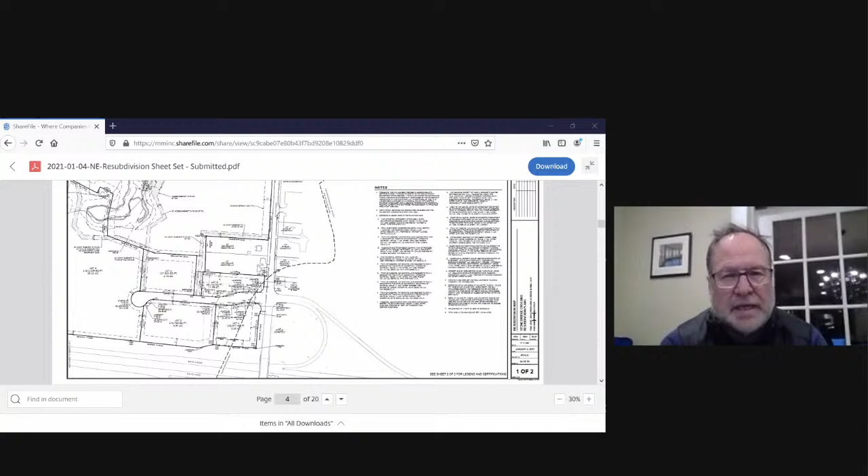Along that east side of the 10 Mile River, we had 7 lots, and then on the west side of the 10 Mile River, we had 1 additional lot - 8 lots in total. What's proposed now is essentially the elimination of that section of public roadway that extends northerly from that cul-de-sac back to Route 10, leaving just the 1 section of roadway coming in, and 1 large lot in the northeastern portion of the property. So we now have 6 lots on the east side of the 10 Mile River and 1 lot on the west, a total of 7 lots. That's essentially the major change.

We will still have, as you'll see from the special development plan, a proposed intersection further up where the proposed roadway was going to intersect, but that would be an intersection into a development parcel. They would be connected via a private roadway together. So the traffic circulation will remain pretty much the same, but we eliminate the need for a public roadway with this modified special development plan.

There are 2 other changes with the proposed subdivision worth noting. One is that we originally had a pump station serving this entire property, and in fact a sanitary sewer pump station serving not only this entire property, but also all the properties within the town of Cheshire on either side of Route 10, north of 691, and on the west side of Dickerman Road, so that this entire portion of the town would be able to be serviced by sanitary sewers.

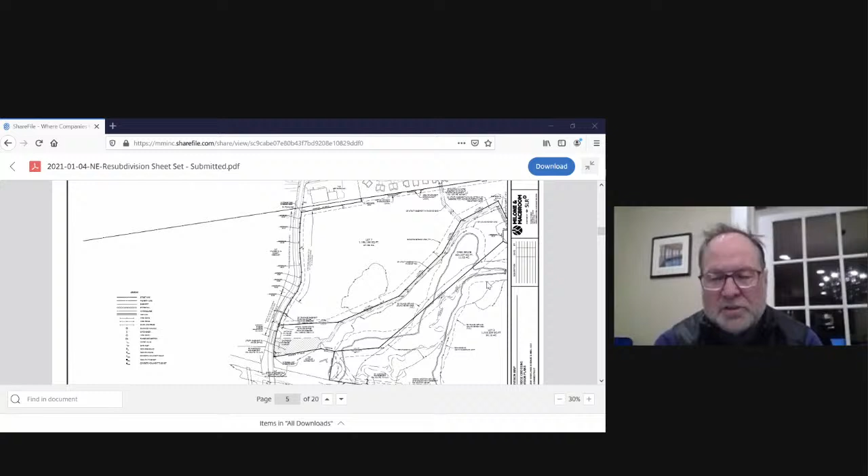That would provide some level of protection for the north side of the 10 Mile River floodplain, and also provide public access into the property along that corridor. The trail system that was going to extend through the site out to Dickerman Road would be located primarily within that open space parcel - so that's another advantage. Those are the changes in the subdivision from the previous application.

I would just point out that the previous application had 8 lots, and the current application is for 7 lots. That's correct, if I didn't say that.

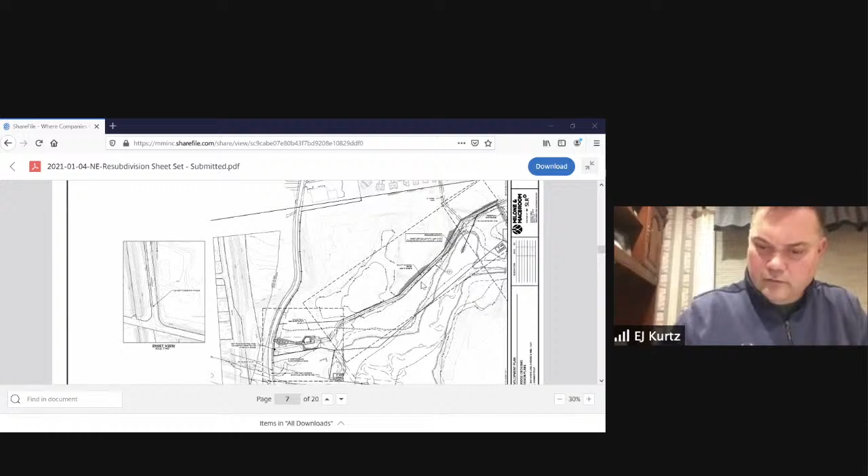Thank you, Anthony. John, I had a question. Does the second entrance still remain on lot 5? Yeah, there will be a second entrance there, and when we get to the special development plan I can show you how that's going to work. So essentially you're just eliminating a public road that goes from north to south. That public road will be taken out, and you're losing a quadrant, a lot. Yes, okay.

Any commission members, any questions? Mr. Metallic: So John, I looked at the plans from last time that we approved it, and it looks pretty similar, besides the road. Are all the sidewalks, all the walkways, everything else the same? I know you mentioned the open space is going to be different, but everything else the same as last time we looked at this? Yes, it looks like that on the photos.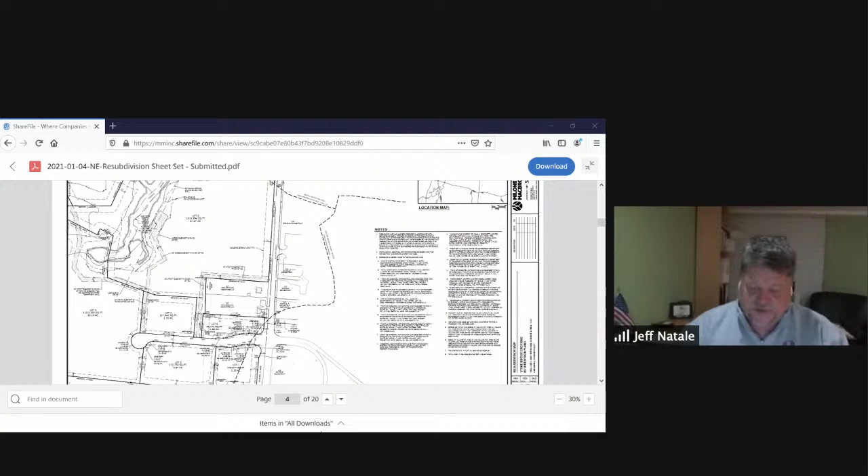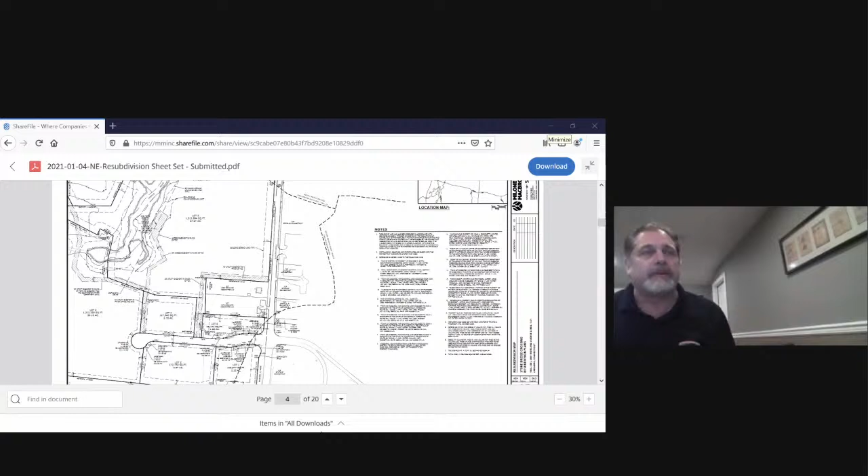I just want to make sure. Okay, good, thanks. Chairman, Mr. Brocato: that's also including all the signage, right? We talked about the size of the sign, we went lower and longer and took the height down. That's all staying the same? Yes, that's correct. Not proposing any changes from anything previously approved, other than the elimination of that roadway, the lot, the open space, and the relocation.

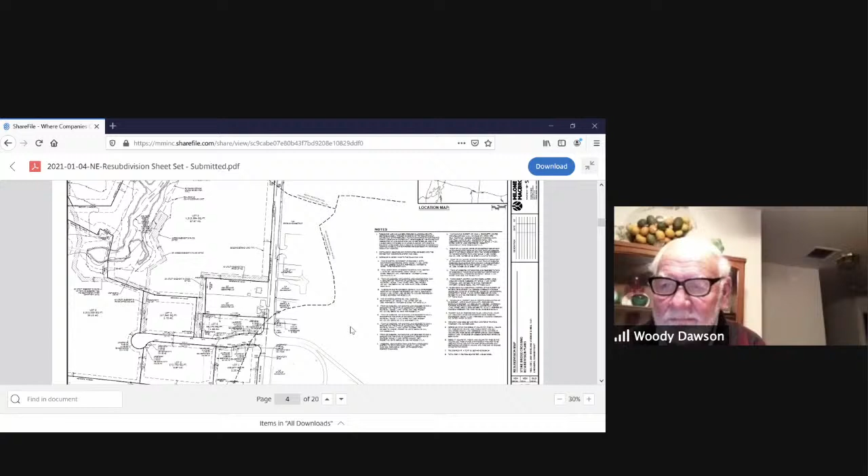Any other commission members with questions? What lot was essentially removed? Did you just make one big lot out of lot 5? Essentially, yeah - if you picture that the road extended through there, it was the right side of the road and the left side of the road, which were 2 lots. Now, because there's no road in the middle, it's one lot.

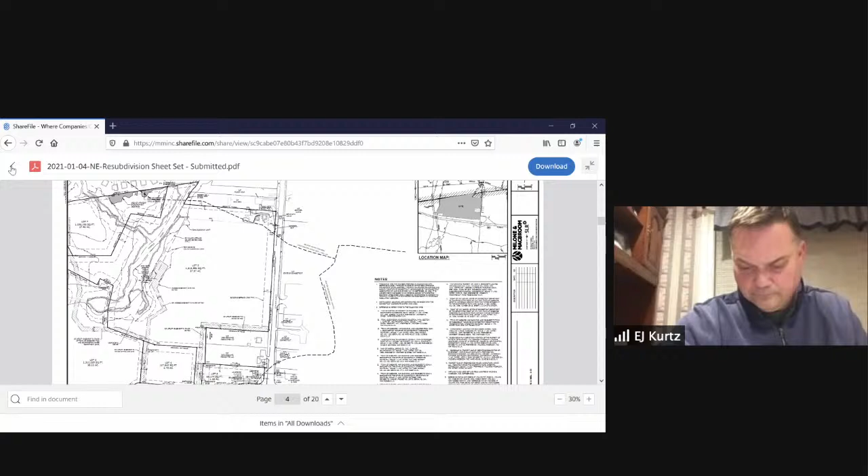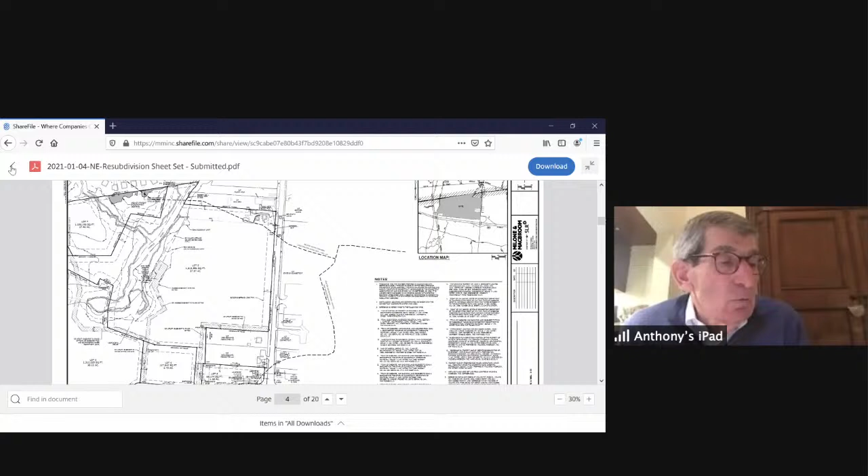All right, Anthony, do you have anything further? We move on to the special development plan, because they really are integrated and go hand in hand with one another. John, were you going to address that?

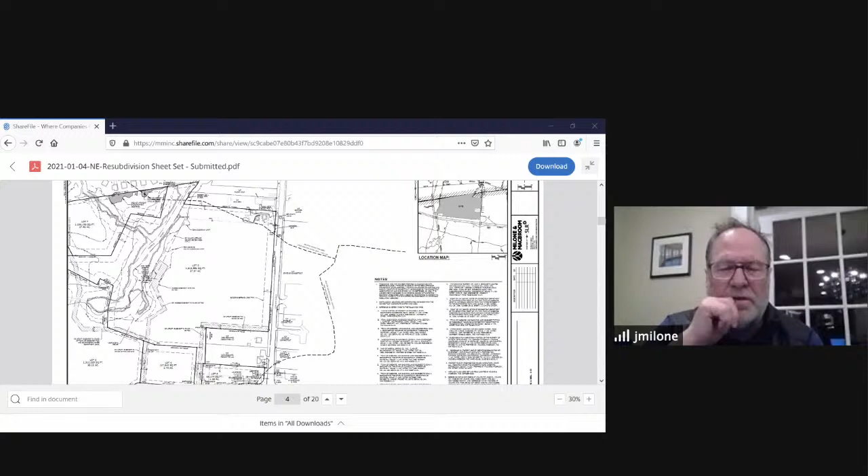Yep. Bill, are you able to put that one up as well? Can you see that one? That's the original one. I don't see it on mine. Oh, hold on, let's see what I can do here. Here's the original one, can you see that one?

So on this plan, Bill, is there any way to move it over a little so we could show where it goes? Not really, John, this is the limits of my technology here, so. It's a lot more than I could do.

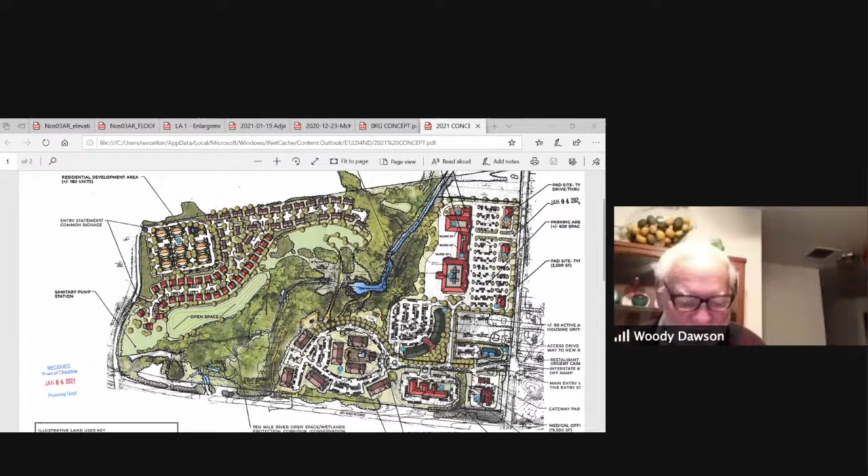Reverse. Reuse. Mr. Dawson, do you have a question? No, I'm talking to myself. I'm looking at the maps and seeing the reverse and so forth, what's going on. I'm gonna shut my mic off. I apologize, Mr. Chairman. Oh, no, that's okay. Just wanted to make sure.

Any questions on what we just heard from Mr. Milone? Okay, everyone's pretty quiet on this.

Attorney Fazzone, do you have more to add to any of this? Couple points of clarification, maybe addressing Mr. Bricato's question.

This property is actually zoned an interchange special development district. And that was done at the beginning, I think, going back probably 2018. And the special development plan has what Mr. Bricato was referring to as special regulations.

And then this is a concept plan. We have to come back. Any project has to come back to the commission for a specific project application. And the site is kind of broken into different segments.

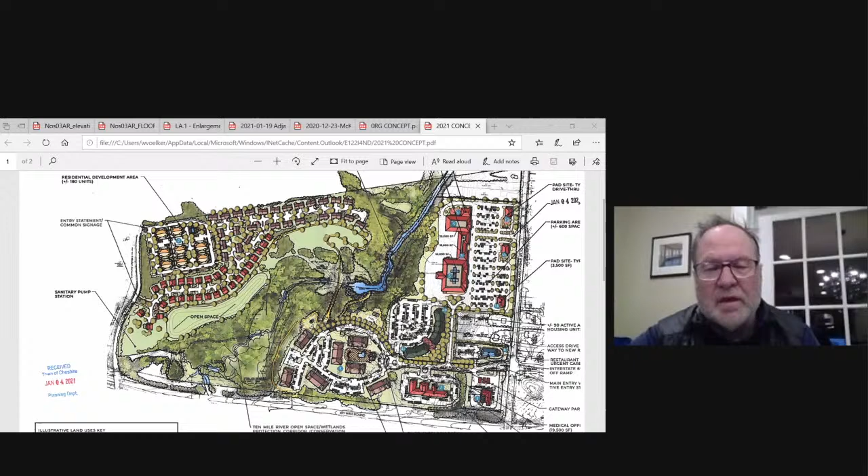I don't have that in front of me. I just wanted to make a clarification that kind of just enforces what you said. The phasing is not submitted as a chronology, but just different types of use.

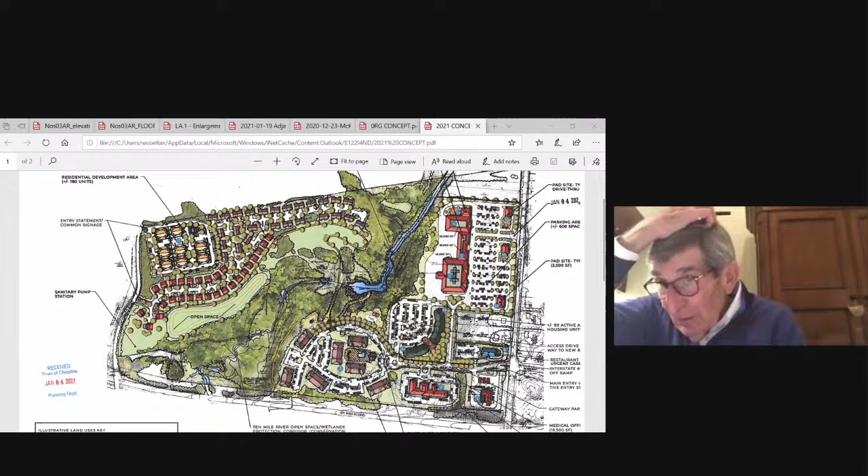And if you were to see where the phasings are marked out, the area, so there's a concentration of the residential area on the west side of the river as one of the areas, where the commercial is another, and then a third down where the age restricted housing or those other uses are. But I just want to make sure and emphasize that they're not intended to be chronologically done.

And most likely, the first phase will have to be related anyway to support the building of the sewer system. And that's all that I had, EJ.

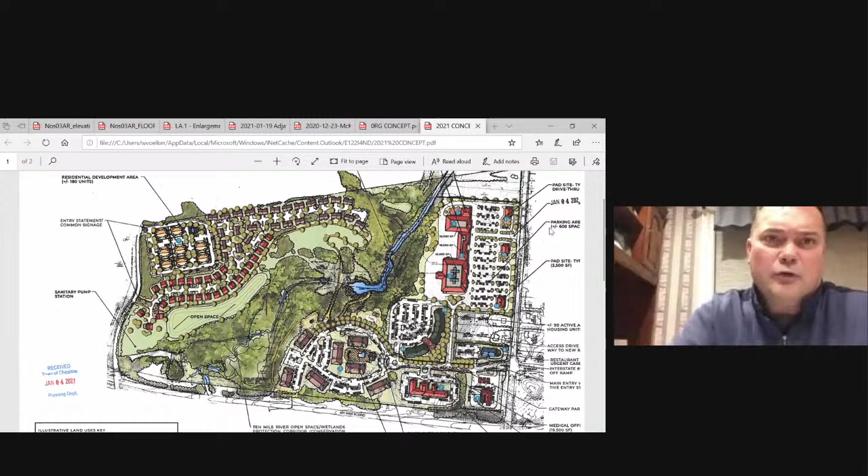Mr. Kirk: Well, when you talk about the phase part of it, let's just take the east side of the river right now. We're talking like the two entrances and ways to ingress and egress. Would both of those be done? I mean, you talk about in a phase. Say you did the big commercial part first, and only did an entrance that is on the north side of the property. I mean, that might be a problem, if you didn't.

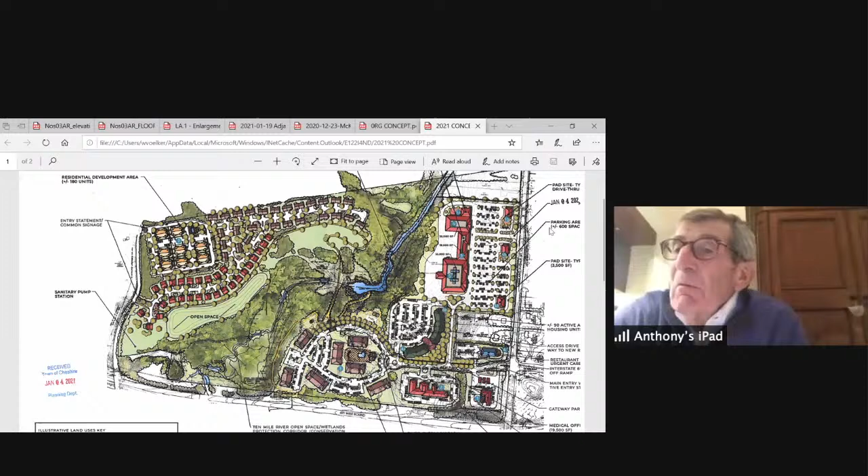Well, we could have a big... the road would have to be built with the access. So okay, so that would be something that would be done all together, to make one big unit. But that might be done after the age restricted.

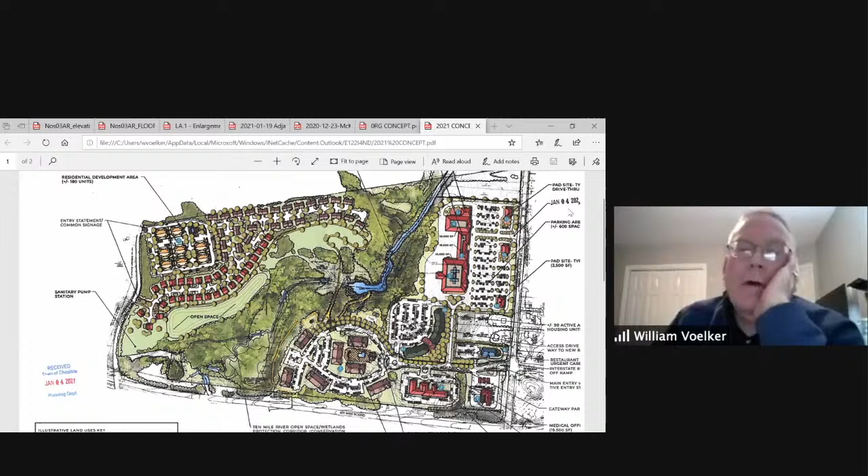We would expect that DOT would probably make them do that, EJ, to put the road in first. So okay, I wouldn't worry too much about the sequence of anything here, guys. It's really going to be all according to market. I'm not likely... so.

Against any of that, and I understand all that part, but I'd hate to see one thing just built and then not have the proper access in and out the way it was designed for. And then, I would say the scale of that facility on the north side, it's substantial commercial development there.

It's going to need signalization. They would build a road because once that's constructed, other things would follow depending on the tenant mix. But clearly, there's certain tenants, if they could get them in there, would command multiple trips and would also generate more interest in the other parcels. So they would build the road and then have the signalized intersection there.

And I only question it because, before we had the roads, they'd have to build a road on whatever. That's correct, they did. So now you're getting rid of that public road that connects the two parcels. And I would just like to make sure - I love the whole thing - I just would like to make sure that both entrances in and out were constructed at the same time.

Mr. Mercado. So if I remember correctly, back when we talked phasing things, we wanted to have a balance. We wanted to have some of that, we'll call it commercial side and the housing side, that we had that nice balance. So we had some tax coming in on the commercial to outweigh the people and the drain on the town that's going to come in on a huge housing complex like that. So I know we did talk about phasing and how the commission would like to see a mix, do some commercial, do some residential, not just blow it all out in one big residential first.